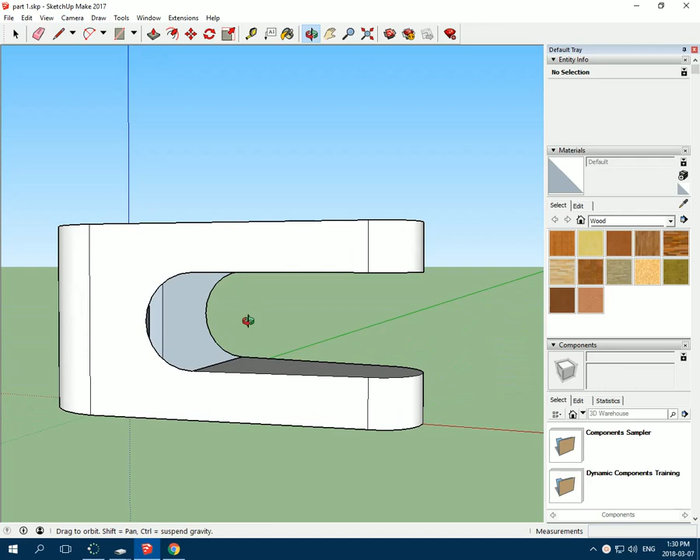The only other part now that we have to look at is filling in the inside radius. Now this part, if you have made a mistake in terms of the top and bottom circles and the part that we erased, this is where you're going to see it.

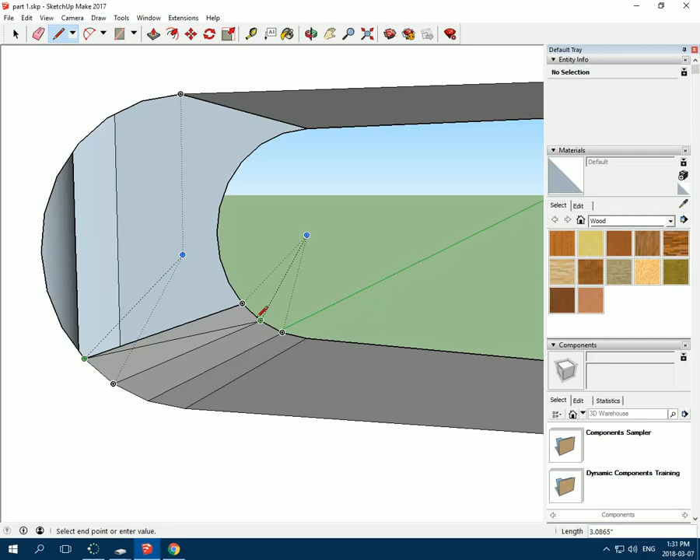So what you're going to do is click. That line should be green - that indicates straight. Now if you find that it's not green and it comes across like this, it doesn't fill in, go across and try diagonal. Sometimes you can save it without having to redo it. So we just do this all the way across, like so.

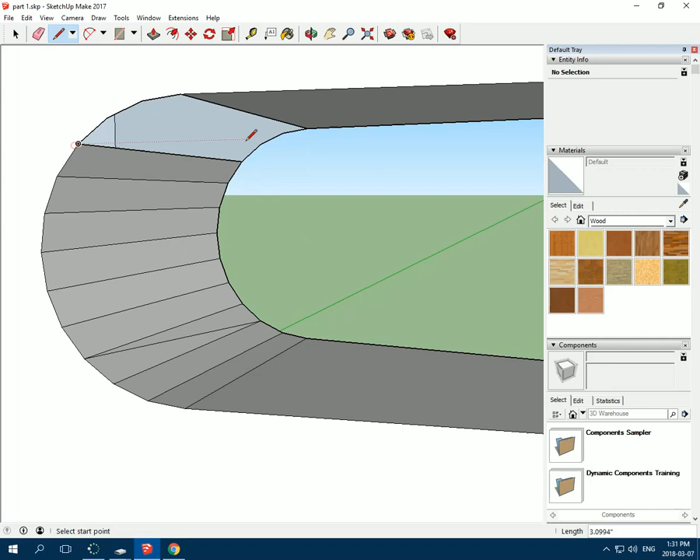Okay, we're just going to keep going like so. I wish there was a quicker way to do this. Unfortunately, there's not. Okay, so we've got that.

Now, I don't know if yours has this, but mine has a little bit missing. So if you've got that, you just kind of go like so. That'll fill that in. Okay, I've got a little bit of extra stuff left over.

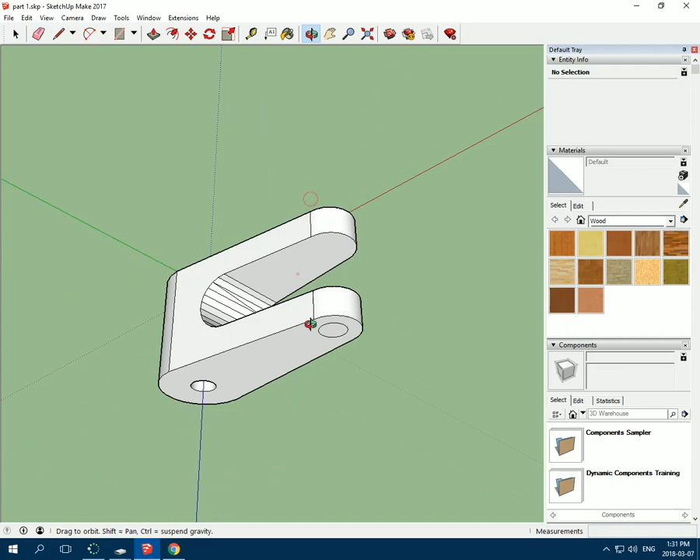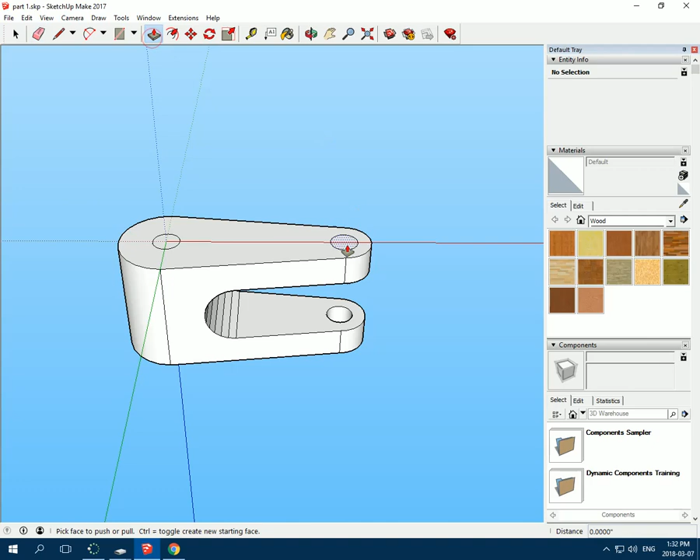Okay, and let's push that through. Same with this one here. Let's erase the stuff we don't need. Get our eraser. Erase, erase. Okay, push all the way through like that.

Now that's where you should be. Okay, now if we go over to our print, this little section here shows this from the top. Now unfortunately, they don't give the measurement of the height of this. They expect you to do some mathematical trigonometry, which I'm not going to expect you to do. I'm going to tell you from here to there is 3 inches.

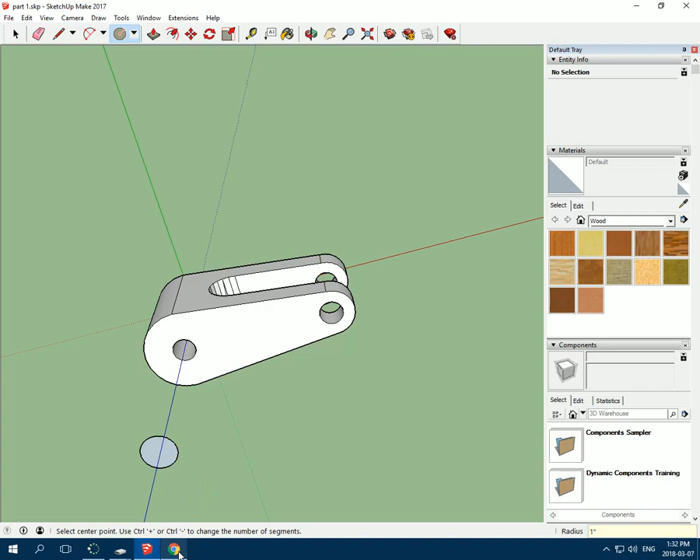So the largest diameter is 2 inches, and so I'm going to start with a circle. I'm also going to do it off of this, not on here. So we're going to go circle, like so, 1 inch radius. There you go, just like that.

Now what I'm going to do is I'm going to push and pull it 3 inches. Okay, 3 inches, just like that.

Now I'm going to put that flat on. And that's the flat here, and you can see it here. It's kind of like shaved down to be flat. So it says that flat thickness is 1 inch.

Now the way I did it was, I went like so, and then perpendicular - 0.5 each way. Perpendicular means 90 degrees. 0.5. Okay, I just go like so, just like that.

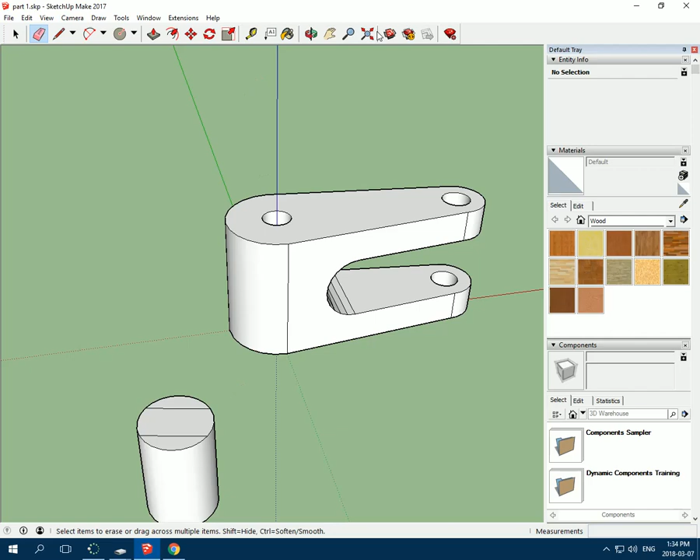Okay, now we can erase the stuff that's inside because we're not going to need that. Now if you look at your print, it says the height of this is 1.5.

So what we're going to do is push and pull it down 1.5. So we're going to do the first one, click. I'm going to key in at 1.5 inches, just like so. Now the other one, we don't need to key in - we can just touch like right there.

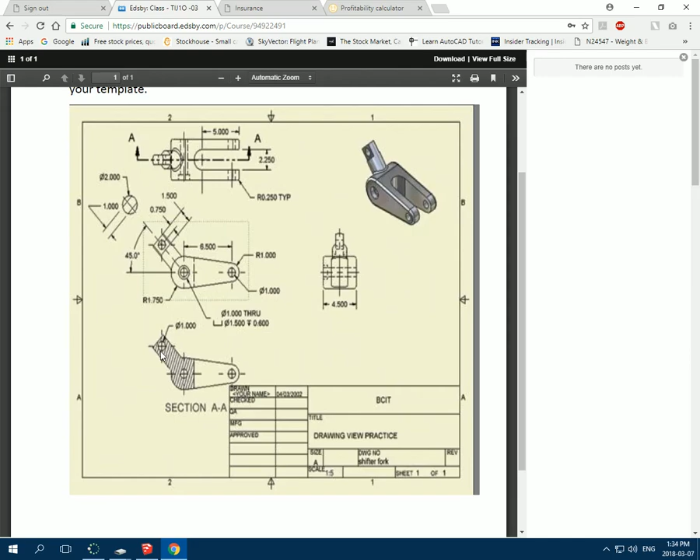Okay, now last but not least, we have to put this hole in there. It's all the way through. It says that hole has a diameter of 1 inch, and we're going to have to key in the radius, which is 0.5. You can either use an X or you can use a cross to find your center. And it's 0.5. Make sure you get rid of the stuff that you don't need.

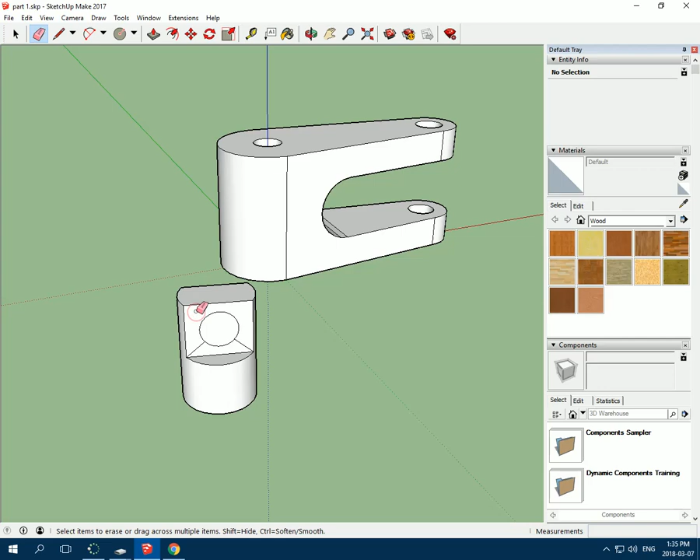And we're going to push it through, just like so. And it should disappear, and it does.

Okay, so to get this on here, now you're going to have to make this into a component. By doing so, it'll allow you to move it around. Okay, so we got this.

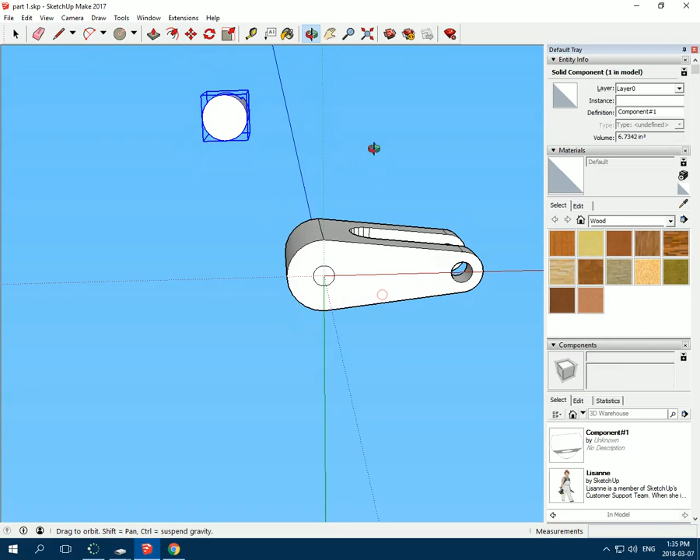Now what we're going to do is we're going to now rotate it. So depending on how you chose to do this, it's going to dictate the angle that you'll move it at.

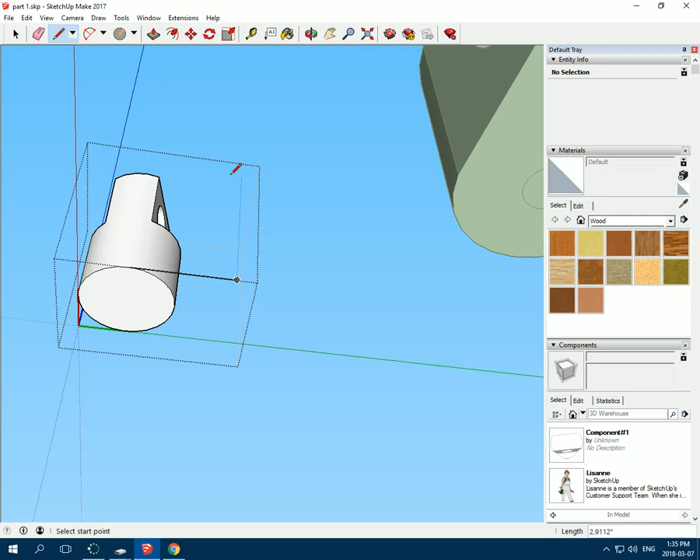Okay, let's see. If it's giving you difficulty as far as allowing you to move it correctly in a straight motion, just going to put this line on it, should give you enough.

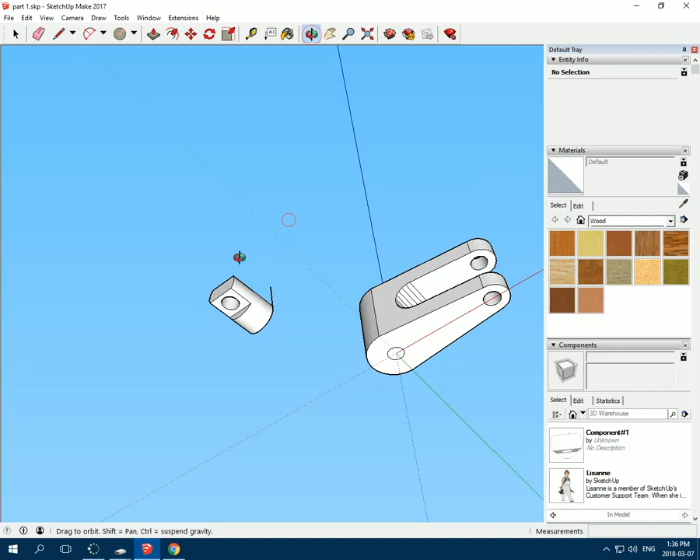Key at 90, just like so. Okay, so we've got that. Once we have that, we're now going to - it's got to go in on a 45. So 45, okay.

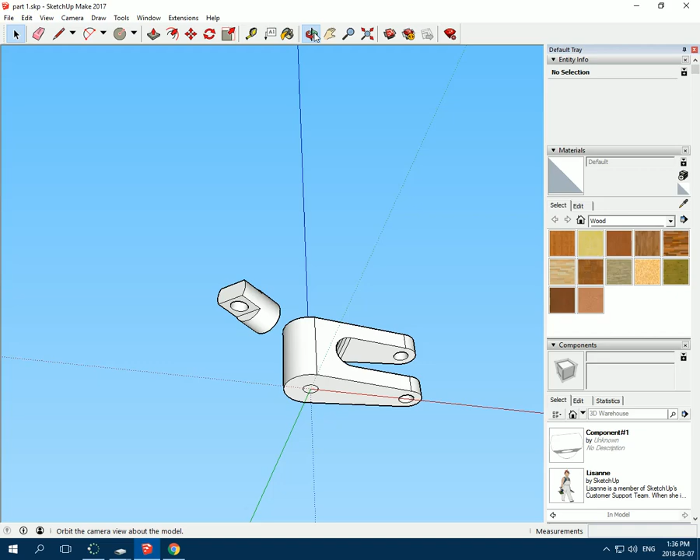Now for this particular part of the exercise, we're not really looking for precision accuracy. We're mostly looking for kind of aesthetics, because we're going to try and avoid complex mathematics required to get this exactly in there.

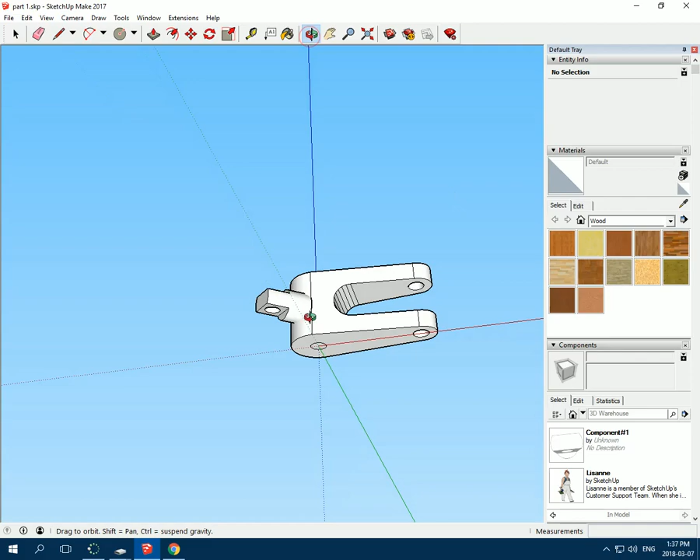So you might have to move your angle of attack just to get it so that it's correct. Now if it's sticking kind of like a little off like that, feel free to rotate it just a bit, like so, and there you go.

Now I do ask that you do dimensions. So to do that, once again, dimension, and add all the dimensions, or as many as you can that were included in the drawing. Okay, so that's it for drawing number 2.